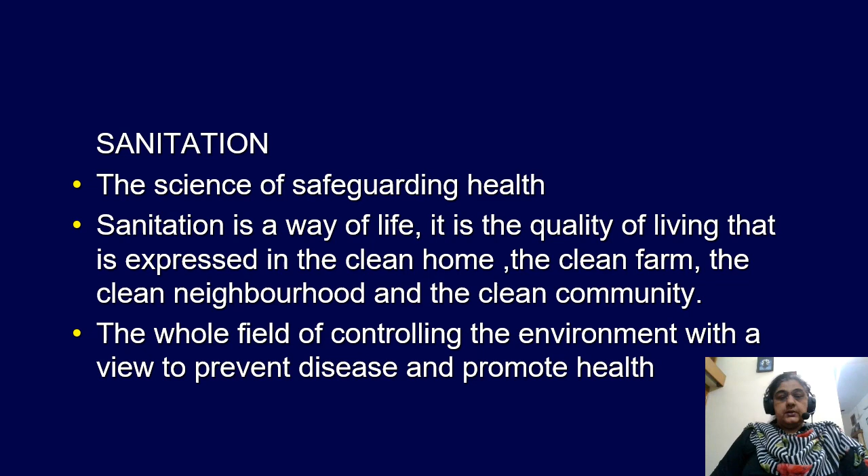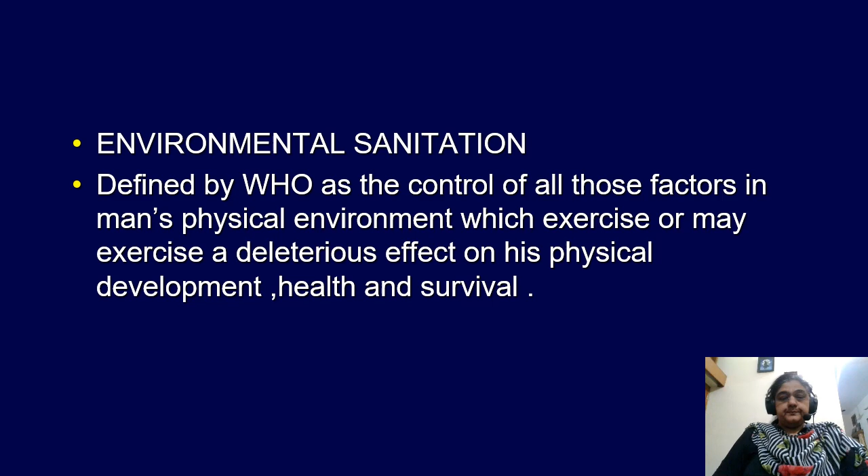Environmental sanitation is defined by WHO as the control of all those factors in man's physical environment which exercise or may exercise a deleterious effect on his physical development, health and survival. Water forms a very important part of environment. Adequate supply of safe water and basic sanitation is one of the essential components of primary health care.

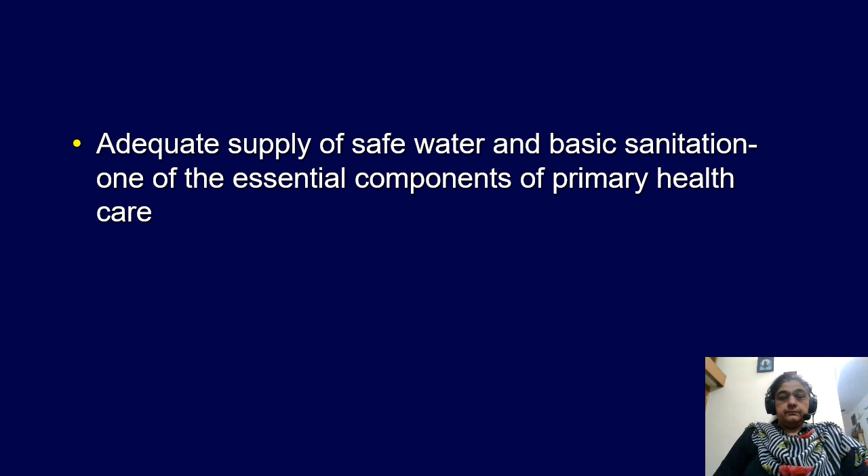So what is safe water? Water that is free from pathogenic agents, water that is free from harmful chemical substances, water which is pleasant to taste, that is, it is free from odor and color, water which is usable for domestic purposes, and the appearance, taste, and odor of the drinking water is acceptable to the consumer.

Then potable water or wholesome water. This is safe water, which is pleasant to taste, it is odorless, it is cool and it is colorless, and it does not stain the clothes or the utensils.

Now, water has various uses. It can have domestic uses, then uses for public purposes, it can have industrial uses, uses for agriculture purposes, uses for power production and other uses.

Then we have certain norms to calculate the water requirement, which are calculated per capita per day. In our country, it has been estimated that in rural areas, the minimum requirement of water per capita, meaning per person per day, is 40 liters and it can vary up to 55 liters. Whereas for every head of cattle, the water requirement is calculated at 30 liters per head of cattle per day.

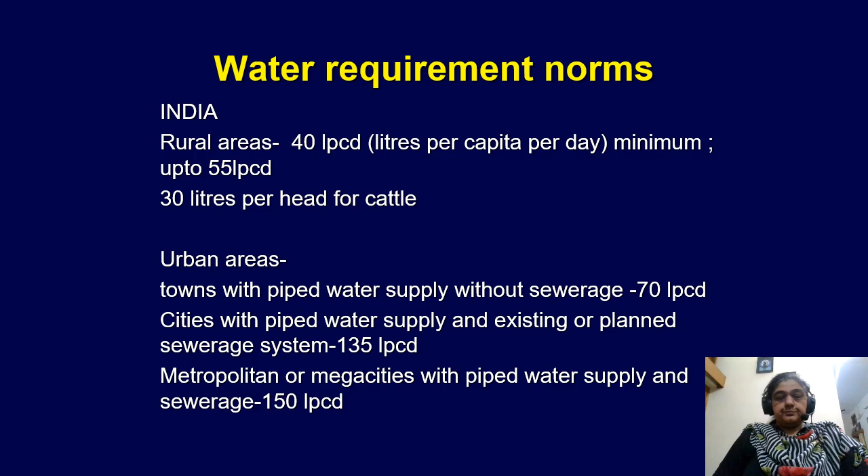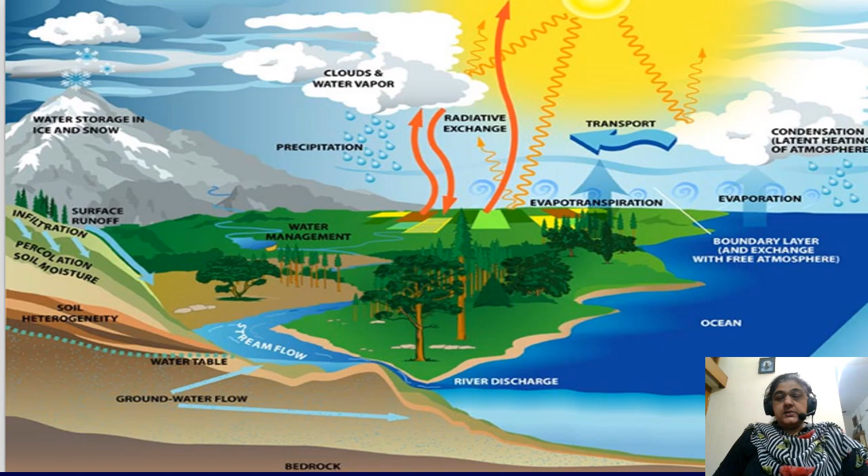So you see, water exists in various forms as ice and snow. Then there is surface runoff. It infiltrates and percolates into the soil. And then there is a water table below the soil in the subsoil. Then there is flow of groundwater into streams and rivers and ultimately into oceans. Water evaporates from there, then clouds are formed and again rainfall occurs, and the cycle continues.

The water resources or reservoirs are distributed such that the ice caps and glaciers have 1.7 to 2.02% of the water on earth. Soil moisture is 0.005 to 0.012%. Rivers, lakes and inland seas are 0.14%. Groundwater is 0.4 to 1.7%, whereas oceans make up 97 to 97.5% of the water on the Earth's surface, and 0.001 to 0.01% is in the atmosphere.

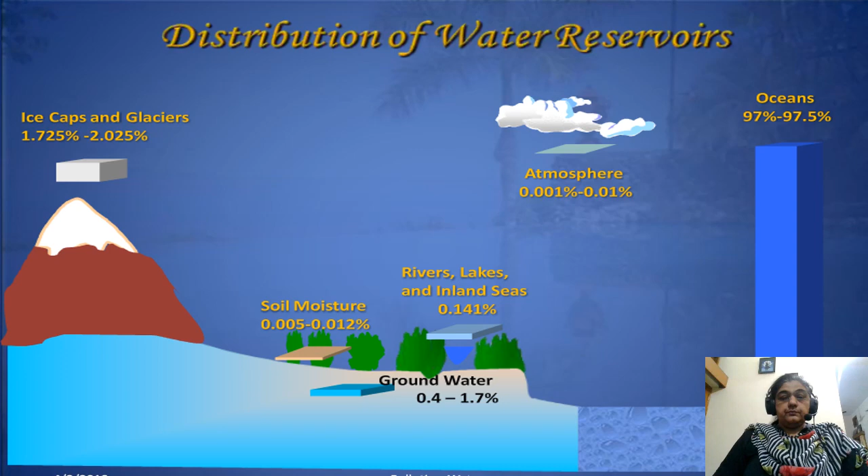The main sources of water supply are rain. Then we have surface water. We can have impounding reservoirs. We can have rivers and streams. We can have tanks, ponds, and lakes. And in groundwater sources, we have shallow wells, deep wells, and springs.

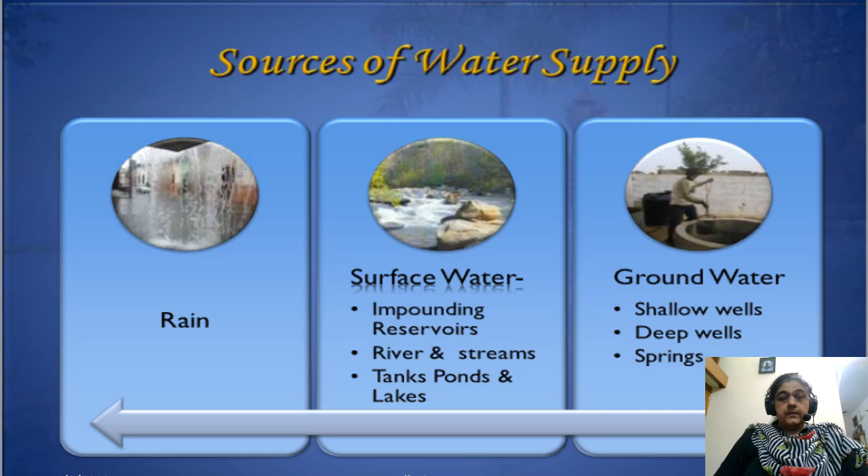Now, what is a shallow well and what is a deep well? A shallow well is that which draws the water from the first level, that is above the first impervious layer. And a deep well is that which draws the second level of water or deeper water, meaning water which is below the first impervious layer.

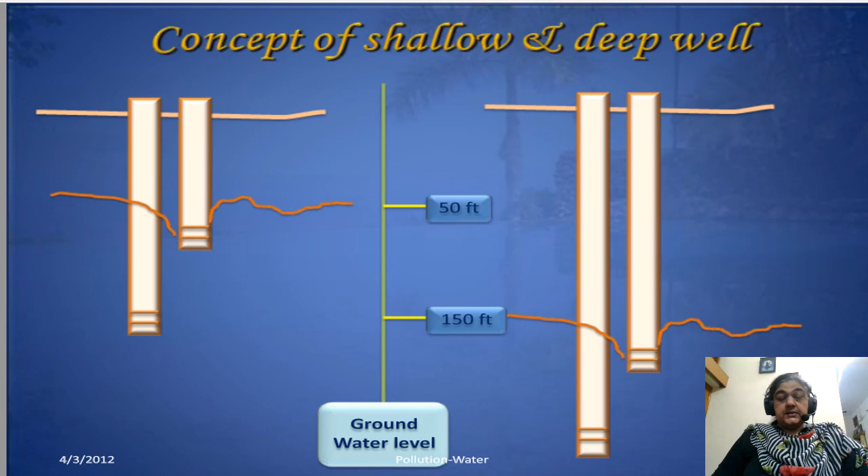So the water from the deep wells is considered safer than the water from the shallow wells. Why? Because water from the shallow wells is the first level of water. It can get contaminated by the water discharged from various sources like the septic system, the animal houses and barns, then the fertilized fields, etc., from the grasslands and woodlands and all. So deep water, below the first impervious layer, is safe compared to the shallow water. However, water can get contaminated even during storage. So even safe water has to be stored correctly for it to remain safe.

Then this is the supply of the water resources. So 97% of the ocean water or sea water is saline water, and 3% of water on the earth's surface is fresh water. This fresh water is divided into ice caps and glaciers, which have 68.7% of this fresh water.

Then 30% of the fresh water is groundwater, 0.3% is surface water, and other sources constitute 0.9%. Now, out of this 0.3% surface water, 87% is present in lakes, 11% in swamps, and 2% in the rivers.

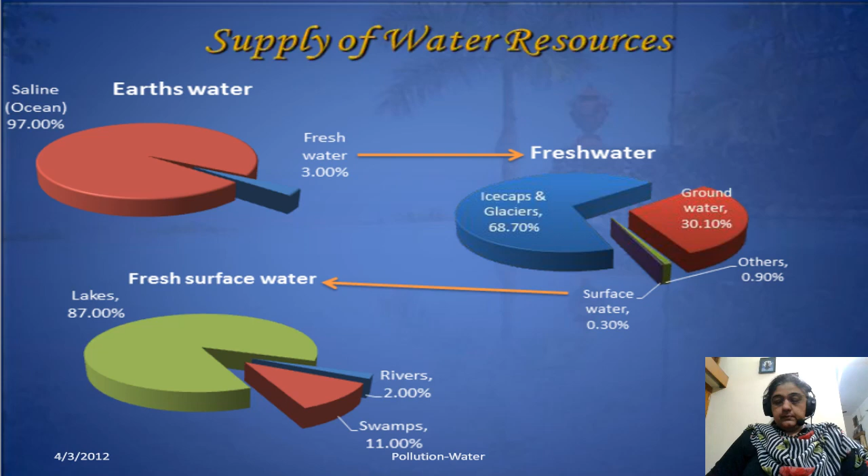So, if you see the utilization of ground and surface water, 89% of surface water is used for agricultural purposes, 9% for domestic, and 2% for industrial uses. And groundwater withdrawals are 92% for agricultural purposes, 5% industrial, and 3% for domestic purposes.

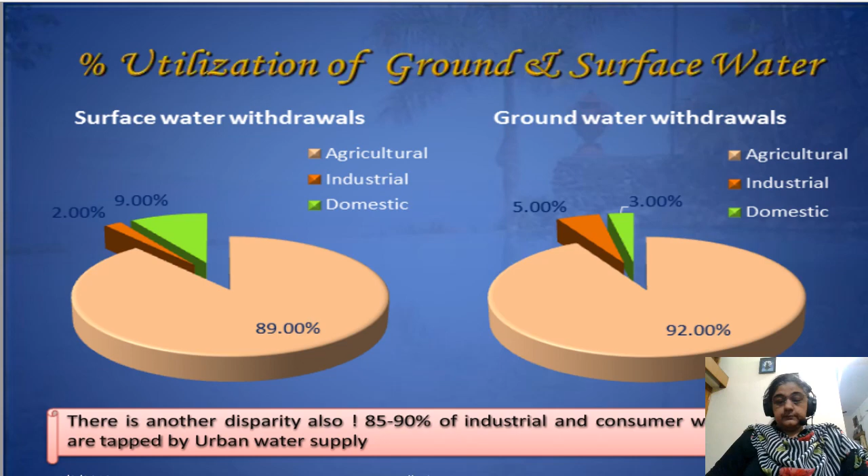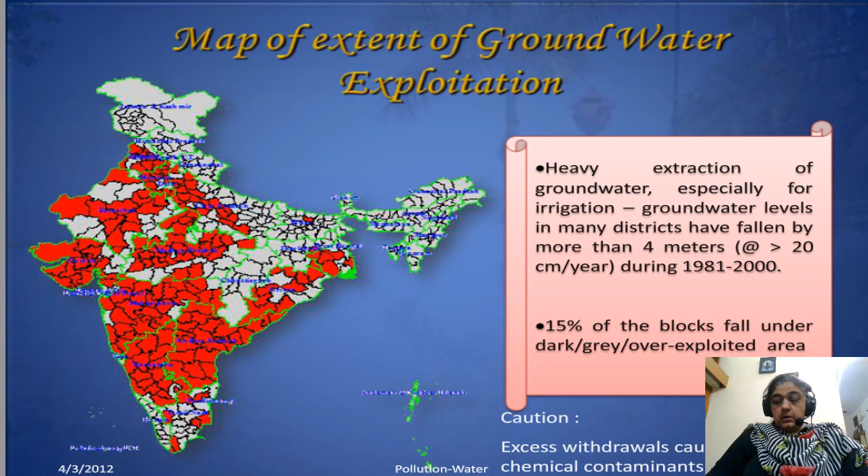Now see, this is the map which shows us the extent of exploitation of the groundwater in the country. So heavy extraction of groundwater, especially for irrigation, has led to a fall in the water table. And this is becoming a very serious problem.

So we are heading towards water scarcity, zero water cities. 21 cities have been predicted that they will be running out of water by 2030. Chennai, it seems, is already out of water. Then we have Bengaluru, we have Coimbatore, and a host of other cities which are likely to run out of water by 2030.

So what needs to be done? We have to catch every drop of water that is falling on the earth.

And most of the rural water supply systems are based on groundwater sources. 85% of groundwater sources are drawn for irrigation, and rural drinking water draws hardly 3%.

So groundwater development in Delhi, Haryana, Punjab and Rajasthan is more than 100%, and in Gujarat, Karnataka, Tamil Nadu and Uttar Pradesh it is more than 70%. So an imbalance is existing between over withdrawal of groundwater and the recharge of the deficit of groundwater.

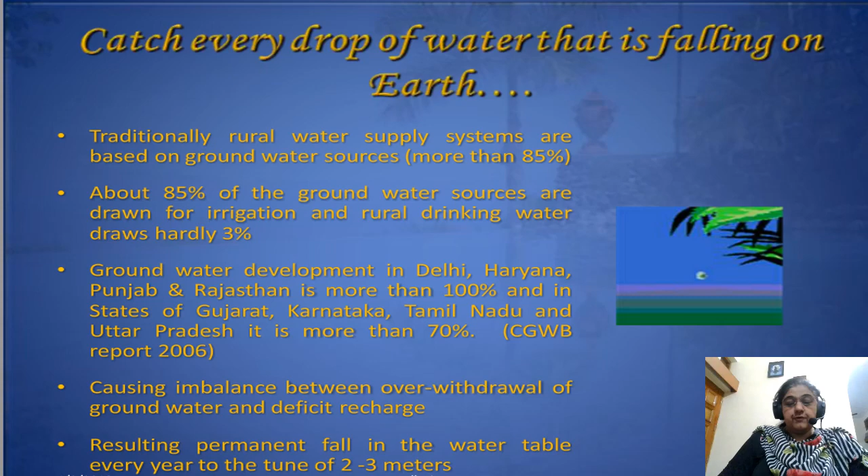So this is resulting in a permanent fall in the water table every year to the tune of 2 to 3 meters.

And there are three major and widely prevalent problems in the sustainable supply of drinking water. These are scarcity of drinking water, then brackishness, then excess fluoride and arsenic content in drinking water. These are manifested primarily in areas with low rainfall and those which have high potential evaporation.

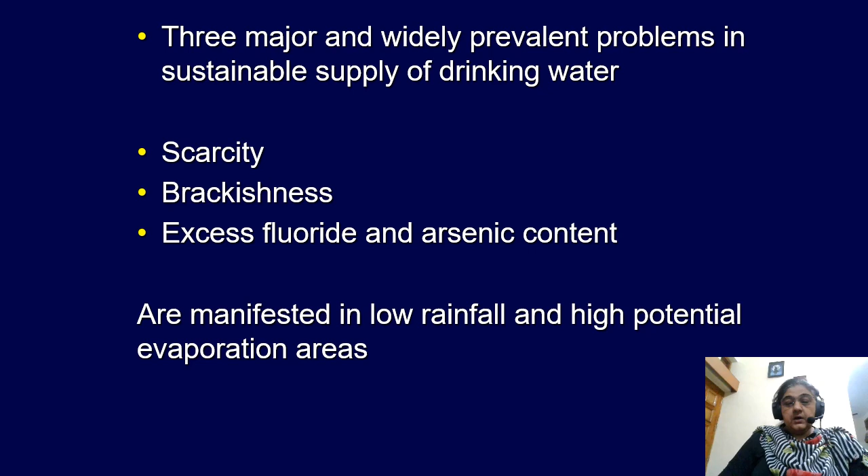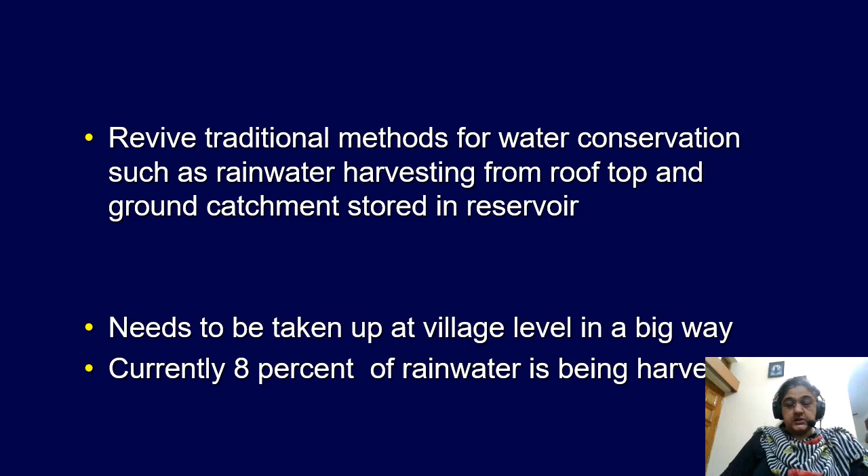So we have to revive the traditional methods for water conservation, such as rainwater harvesting from the rooftop and ground catchment, which is stored in reservoirs. This needs to be taken up at village level in a big way. Currently only 8% of rainwater is being harvested, so this needs to be increased tremendously.

Then there's a term known as water pollution. So water pollution means that something is polluting the water, making it unfit for consumption. These sources can be point source or non-point source.

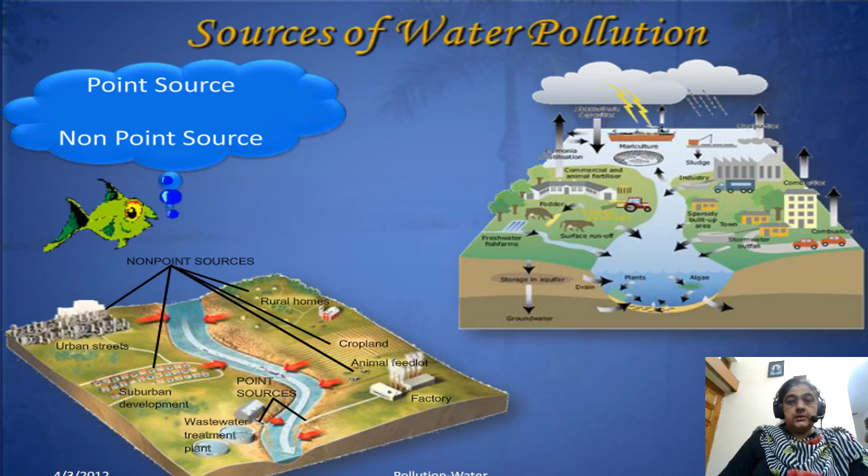And point source may be a single large source which can be localized to one spot, like sewage pipes, leaky gas tanks, industrial sites, and injection wells.

Then we have non-point sources, diffuse sources or many smaller point sources, such as agriculture runoff, urban runoff, construction sites, and air pollution.

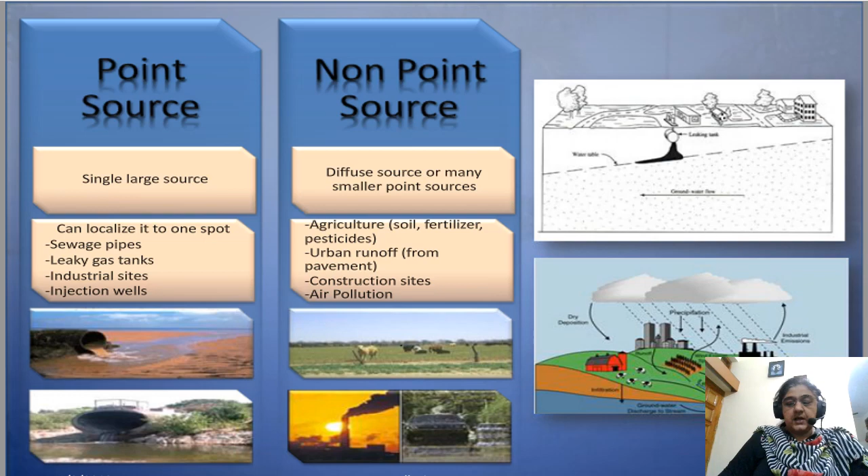So we also have the flow of underground contaminations which contaminate the water table, like runoff from industries, leakage of an underground storage tank, then wastewater from households which can contaminate the wells or even the rivers and ponds.

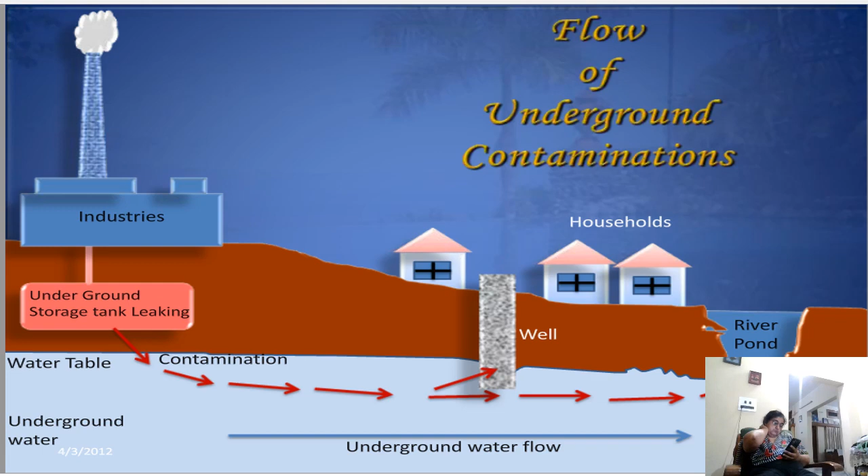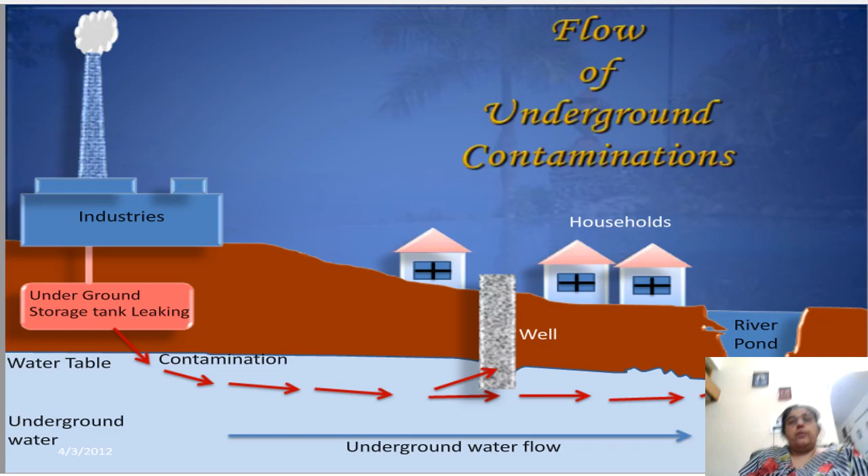Then the classification of various sources of pollution can be agricultural, transport, mining, industry and trade, public supply, and other sources of pollution. So these can be biological pollutants, chemical pollutants, or physical pollutants.

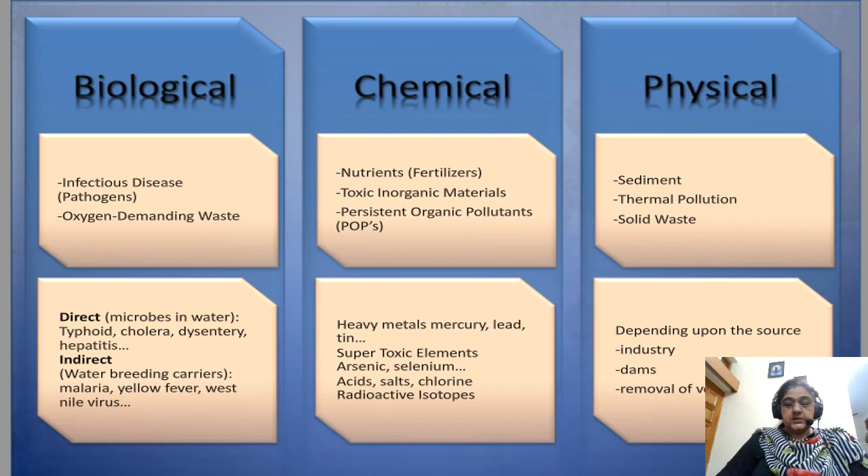So the health dimensions of water pollution are tremendous. We have various types of diseases like waterborne diseases, water-based diseases, water-related vector-borne disease, and water scarce or water-washed diseases due to lack of adequate water.

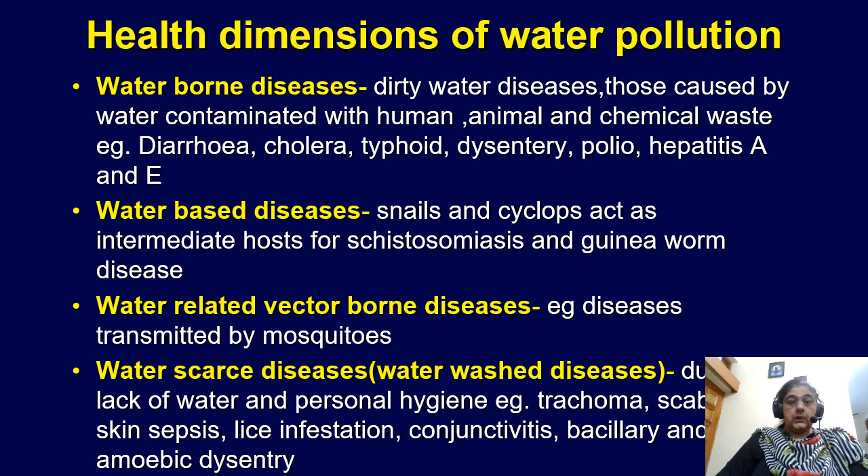So now there is a question: how does water clean itself? Whenever a pollutant is added to a water body, oxygen present in the atmosphere and in the water, in the presence of sunlight, converts some of the organic matter to harmless things in the water body itself, by dilution, by sedimentation, by small fish or animals, bacteria or molds. These digest the organic materials. But there is a certain limit to this self-cleansing by the water body.

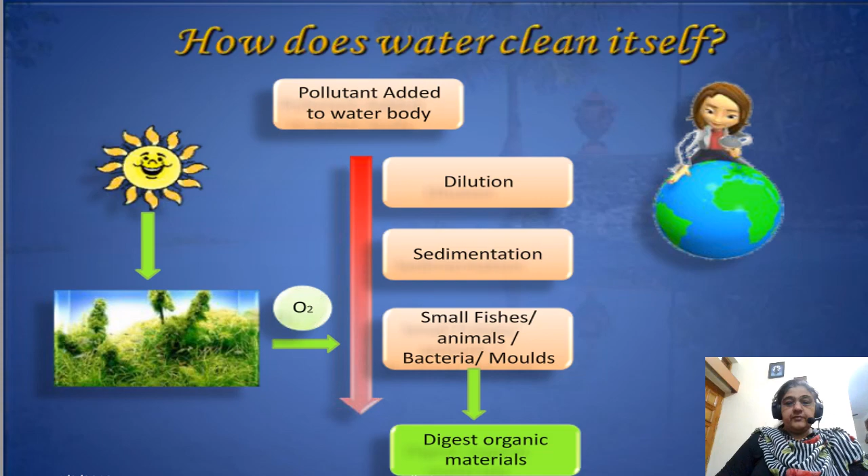So what happens when excess pollutants are there? Then these methods are not sufficient to clean the water body.

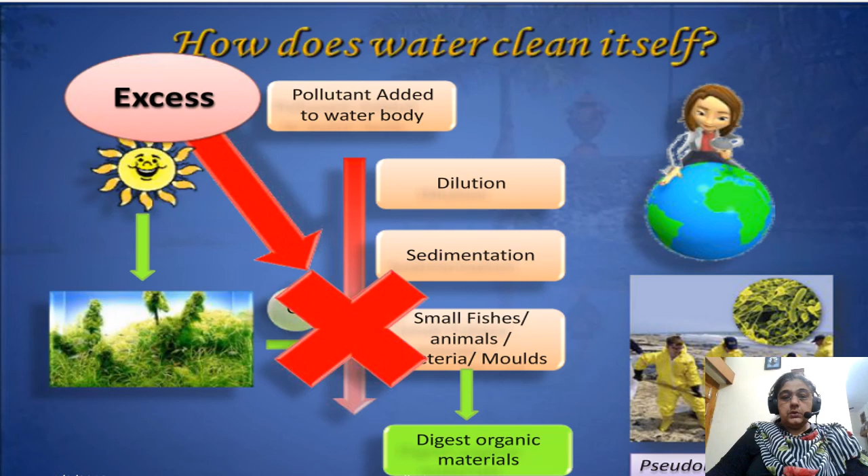The dissolved oxygen in water is a measure of water quality. If the water is gravely polluted, the parts per million of dissolved oxygen at 20 degrees centigrade will be less than 4. In heavily polluted water it is between 4 to 4.5. Between 4.5 to 6.7 is moderately polluted, and 6.7 to 8 is slightly polluted. Good quality water has 8 to 9 parts per million of dissolved oxygen at 20 degrees centigrade.

So why do we need to treat wastewater? Because it causes a demand for dissolved oxygen and lowers dissolved oxygen levels in streams if dirty water is being added to them. Certain nutrients like nitrate and phosphate present in wastewater cause excessive growth of microorganisms, and increase the suspended solids or sediments in the stream, so the turbidity increases.

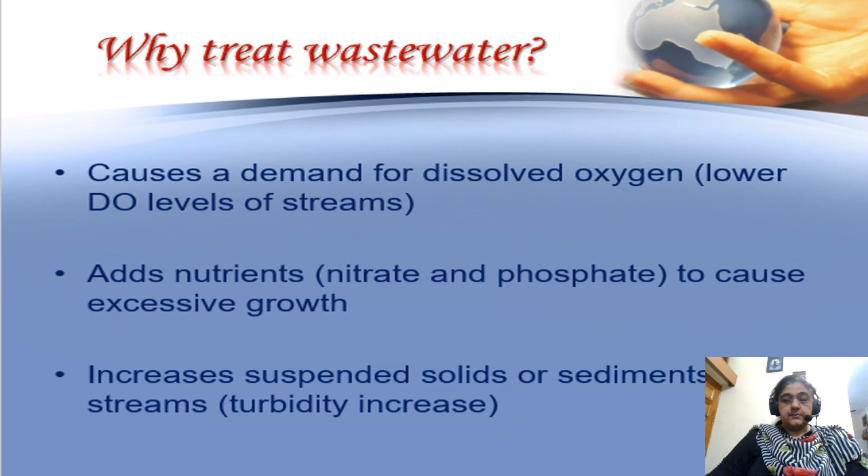For purifying water, on a large scale we have methods such as storage, filtration and disinfection. On a small scale, for household practices, we have boiling, chemical disinfection and filtration.

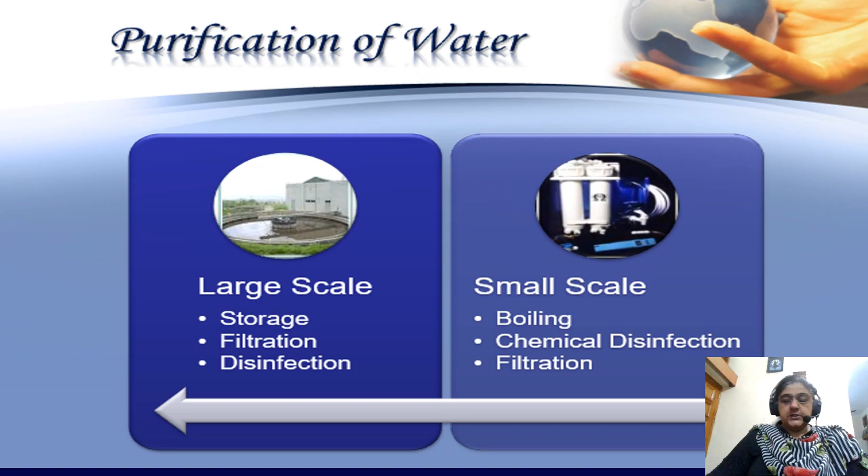In large scale purification, the first step is storage. What happens during storage? Biological changes occur and the bacterial count decreases. The aerobic bacteria bring certain changes in the chemical quality of water, and the physical impurities settle down. There is a drop in the bacterial count of 90% in 5 to 7 days. The optimum period of storage is 10 to 14 days, beyond which the growth of organisms occurs.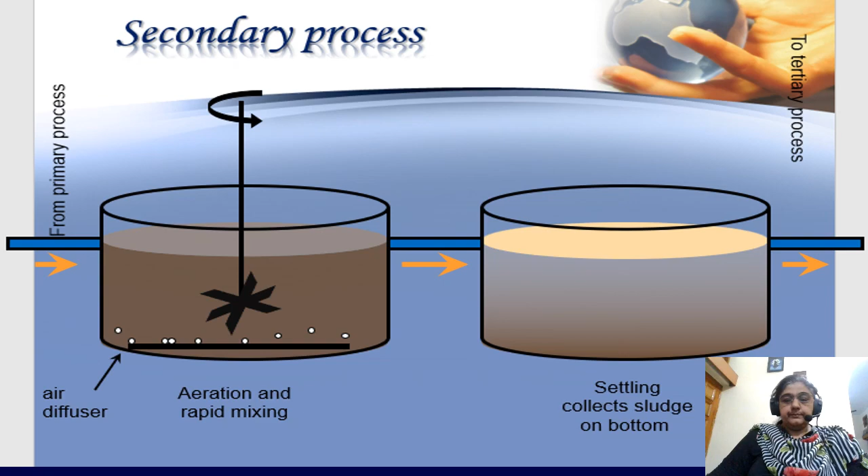Then anaerobic microbiological processes take place, and the nitrates are converted to nitrogen which escapes into the atmosphere. The phosphates, if not removed in the sludge, react with aluminium, and aluminium phosphate is deposited into the sludge. Aeration is done to strip the nitrogen gas and to reoxygenate the water, meaning we want to increase the dissolved oxygen. So the quality of water improves as the dissolved oxygen levels go up.

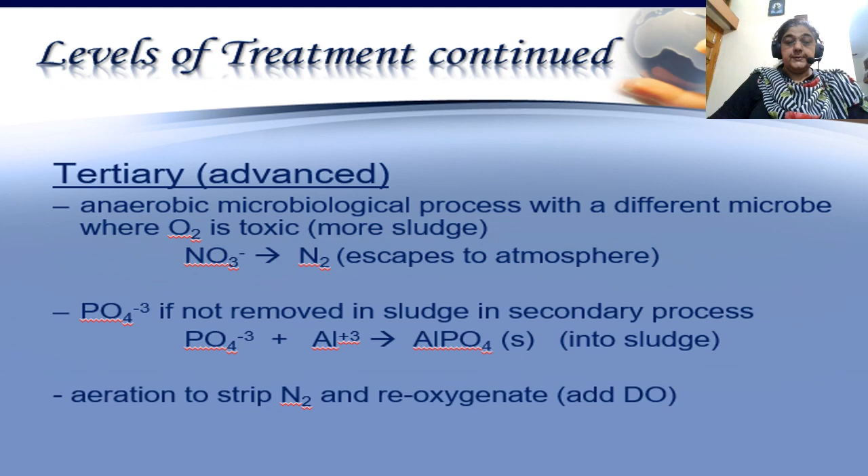In tertiary processes, there is slow mixing to keep the suspended particles and oxygen out, and then we lead the effluent to a settling tank where the sludge settles on the bottom and the supernatant is drained off.

Then we have various kinds of filters: slow sand filters, rapid sand filters, pressure filters and diatomite filters. A slow sand filter has a layer of slimy growth consisting of algae, diatoms and bacteria over the filter bed. It takes some time for this layer to appear, known as ripening of the filter bed. Below it is the filter bed made of sand, and an under-drainage system running between the various chambers of the filter.

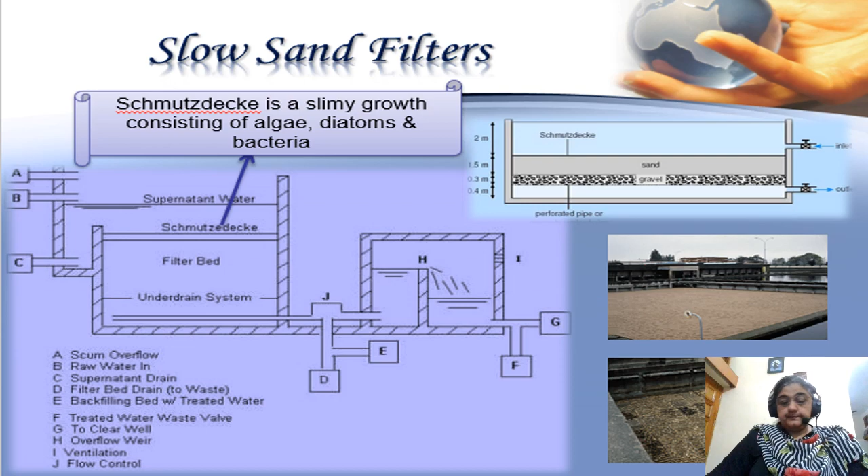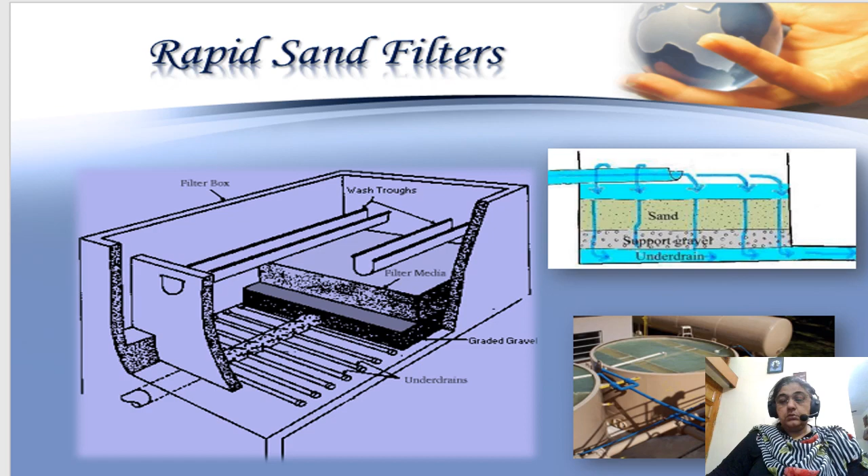Rapid sand filters are different from slow sand filters; they don't have the organic layer. In this method, chemicals are added, and by flocculation the impurities are made to settle down, followed by further purification of the water.

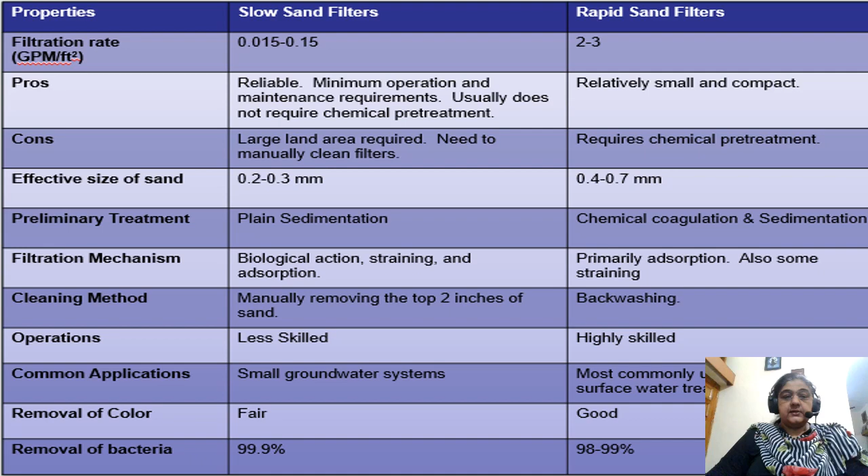Then the next step is disinfection, meaning we add a disinfectant. What is a disinfectant? Any substance capable of destroying pathogenic organisms and which is less influenced by physical and chemical surroundings. It should not leave products which render the water toxic, impart color to the water, or otherwise make it unpotable. The disinfectant should be readily available at a reasonable cost with dependable availability. It should have residual properties to prevent recontamination of water, and it should be amenable to detection in small concentrations.

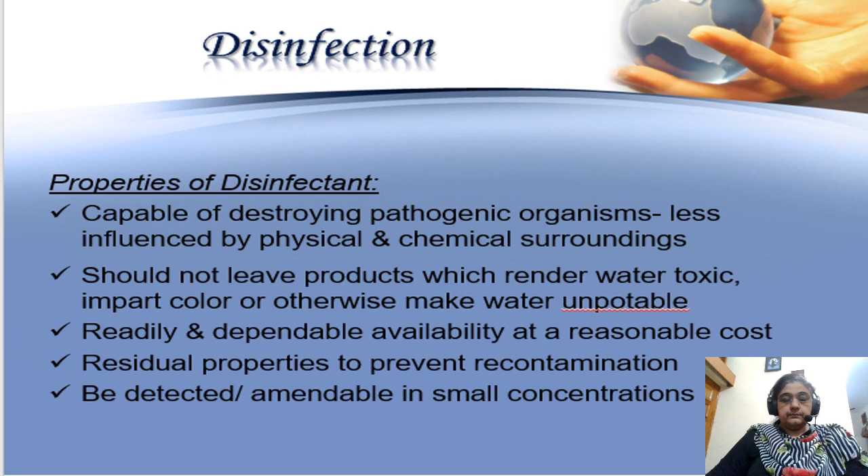Then chlorination of water. Chlorination is the process of adding the element chlorine to water as a method of purification to make it fit for human consumption as drinking water. It is a supplement but not a substitute for filtration. Water treated with chlorine is effective in preventing the spread of disease. The disinfecting action of chlorine is due to hypochlorous acid, and it is effective when the pH of the water is around 7.

Now the chemical reactions in water: when chlorine is added to water, it reacts to form a pH-dependent equilibrium mixture of chlorine, hypochlorous acid and hydrochloric acid. Depending on the pH, hypochlorous acid partially dissociates into hydrogen and hypochlorite ions. In acidic solution, the major species are chlorine and hypochlorous acid, while in alkaline solution effectively only hypochlorite ion is present, with very small concentrations of other chlorine ions found.

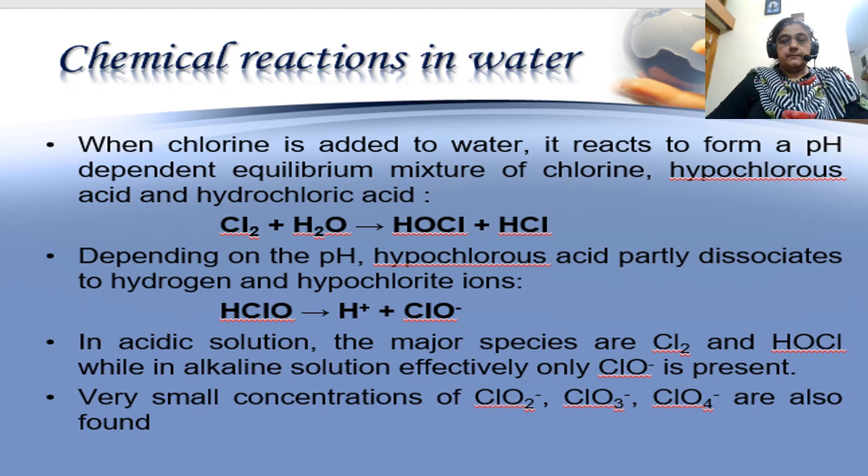The basic principles of chlorination are that the water should be free from turbidity, because turbidity impedes the process of chlorination. Then we have to calculate the chlorine demand of the water. We have to have a minimum contact period, which should be at least 1 hour, for the chlorine to be in contact with the water so that all the bacteria and viruses are killed. Chlorine has no effect on the spores and on some viruses.

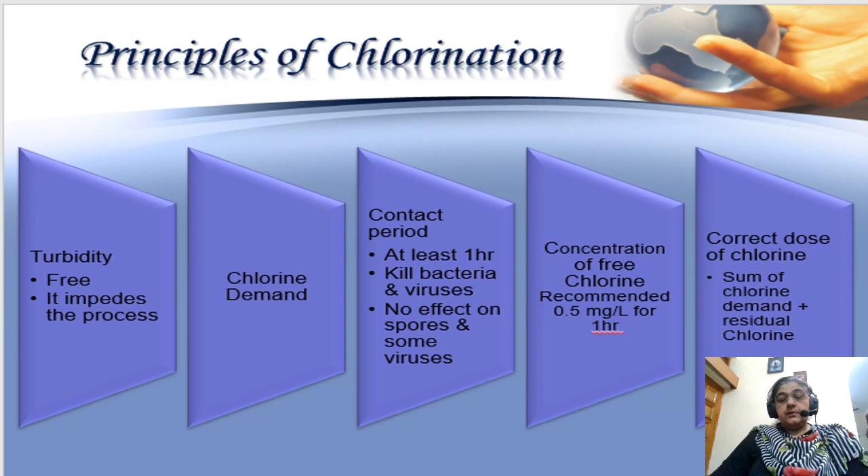Then we need a concentration of free chlorine. The recommendation is 0.5 milligram per liter. Why? Because for any contamination which occurs afterwards, we need to add a bit of extra chlorine. Then we have to calculate the correct dose of the chlorine. This will be the sum of the chlorine demand of the water plus the residual chlorine which we want to be there at the end of the process of chlorination.

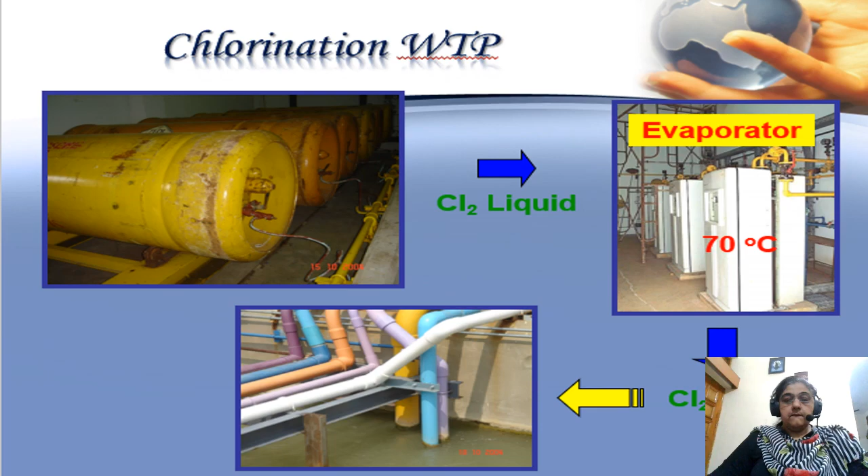We have a term, breakpoint chlorination. It means that no ammonia or free monochloramine radicals are there in the water, because ammonia is a marker of organic matter, and no free available chlorine will be present in the water. That will be the breakpoint. Further addition of chlorine will produce free available chlorine in the water. So when we add chlorine to exceed the breakpoint, it is called breakpoint chlorination.

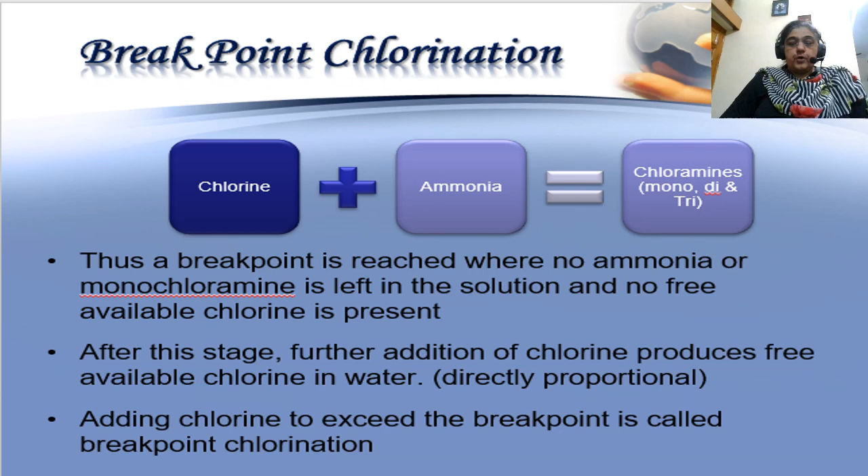Then we have superchlorination, or shocking the system. Under certain circumstances, it will be necessary to subject the water system to an extremely high chlorine dosage. This process ensures that free chlorine residual is high enough to inactivate or destroy harmful organisms. It's usually done at the beginning of an operational season if the system operates seasonally, after installing or repairing the system, when lab results indicate the presence of bacteria, following contamination by flood water, and to control iron and sulfur bacteria.

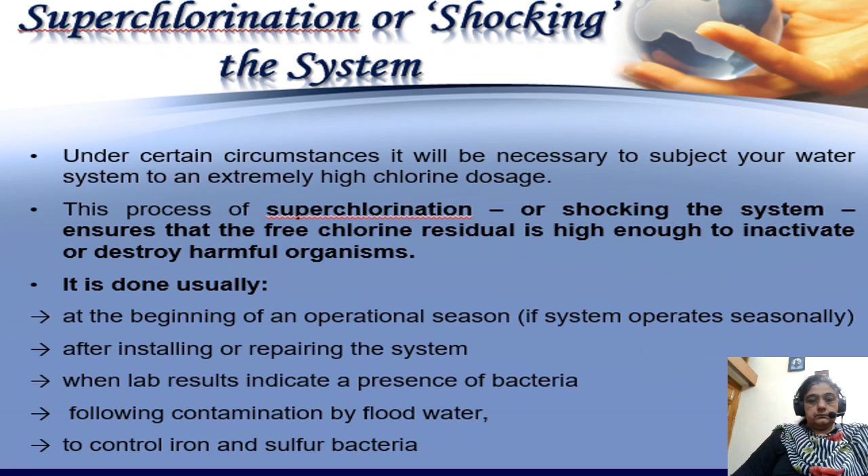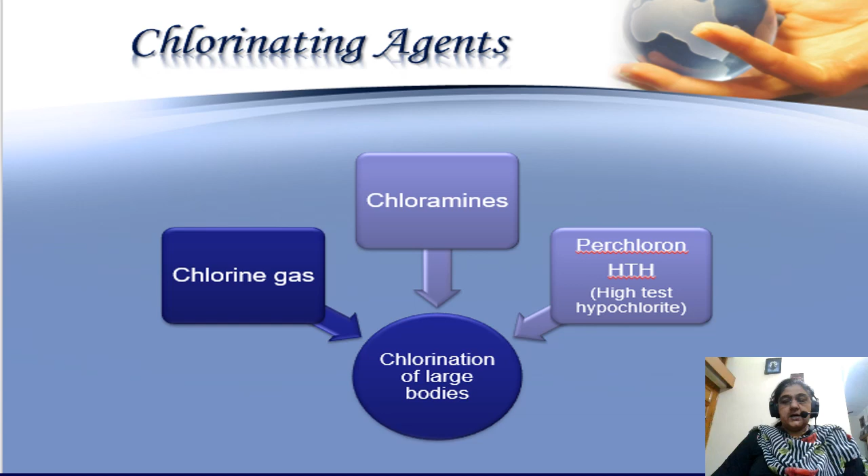The various chlorinating agents are chlorine gas, chloramines and perchloron or high test hypochlorite. Other disinfectants for water are ozone, ultraviolet rays and anolytes. There is a test known as the orthotoluidine arsenite test, or OTA test. This is used for measuring the relative amounts of total residual chlorine, free available chlorine and combined available chlorine in the water.

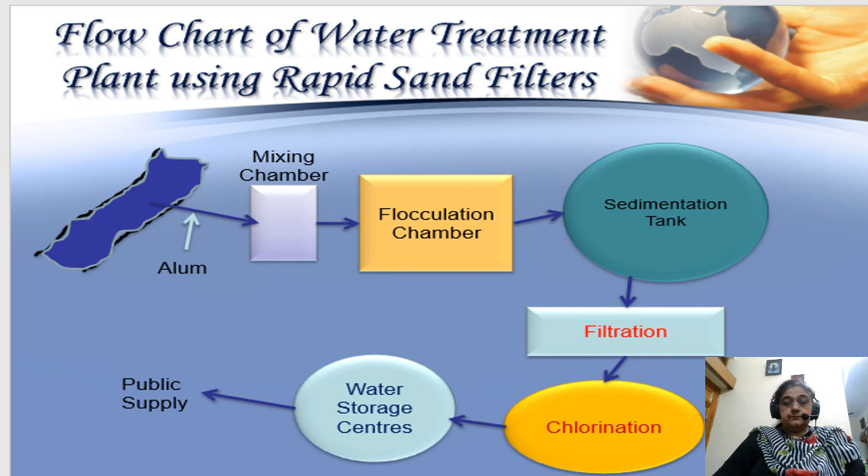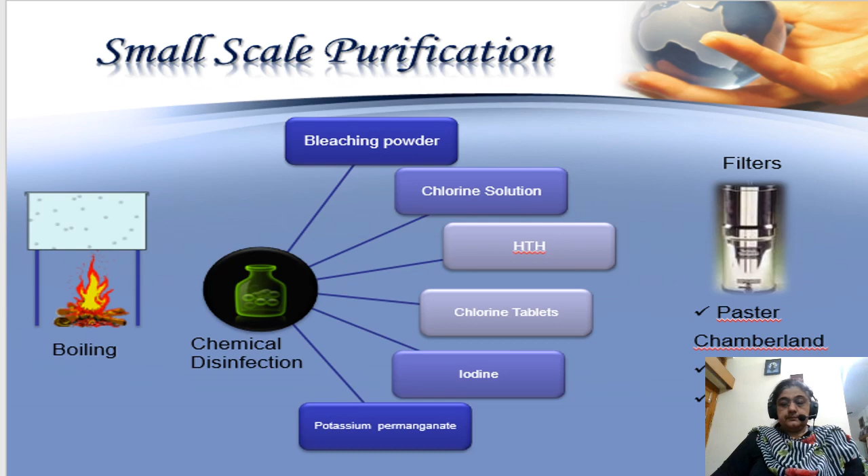So what happens in filters? Different types of candles are used. The Pasteur Chamberland uses a porcelain candle. The Berkefeld filter uses a candle of Kieselguhr or infusorial earth. The Katadyn filter has the candle surface coated with a silver catalyst which kills the bacteria by an oligodynamic action.

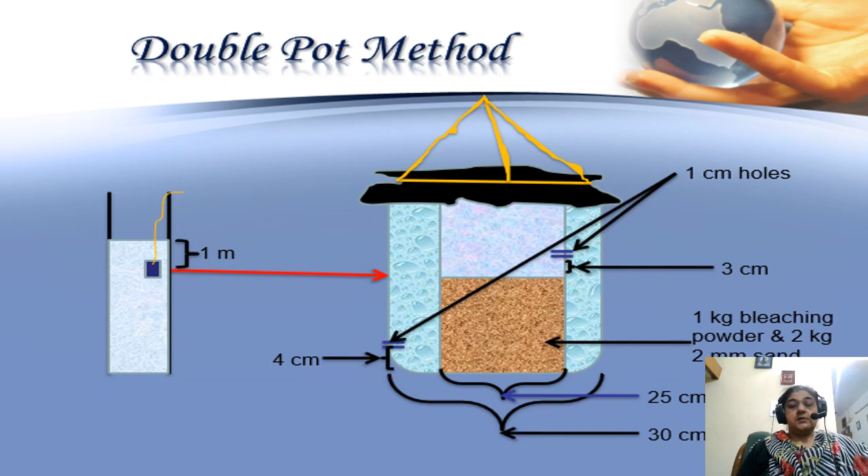In small scale purification, we also have well disinfection, because wells are a source of water for a large proportion of the population. So how to disinfect a well? First, we calculate the volume of water in the well in liters. If we know the diameter of the well, we can calculate the volume, and then we calculate the bleaching powder amount required using the Horrocks apparatus. A double pot method is used to add the bleaching powder to the well. The construction of the pot ensures proper mixing of the well water with the bleaching powder.

So we have a 20-liter bucket of water and we have high test hypochlorite, chlorine granules or powder. We calculate the volume of water in the well. We fill the bucket with clear water from the well. We add 50 grams of high test hypochlorite and we stir it until it is dissolved. And for every cubic meter of water in the well, we add 10 liters of the chlorine solution.

So the importance of purification of water cannot be undermined because all types of impurities must be removed from the potable water. So safe drinking water and wholesome water must meet certain physical, chemical, and biological standards, and purified water can significantly reduce the morbidity and the mortality from waterborne diseases.

So WHO has laid down certain criteria which are known as water standards. Now there are certain aspects of this which are acceptability aspects, which are physical and inorganic constituents. Then we have microbiological aspects, chemical aspects, and radiological aspects. So the water should be free from turbidity, it should be color free, less than 15 true color units, it should be free from taste and odor, and it should be cool.

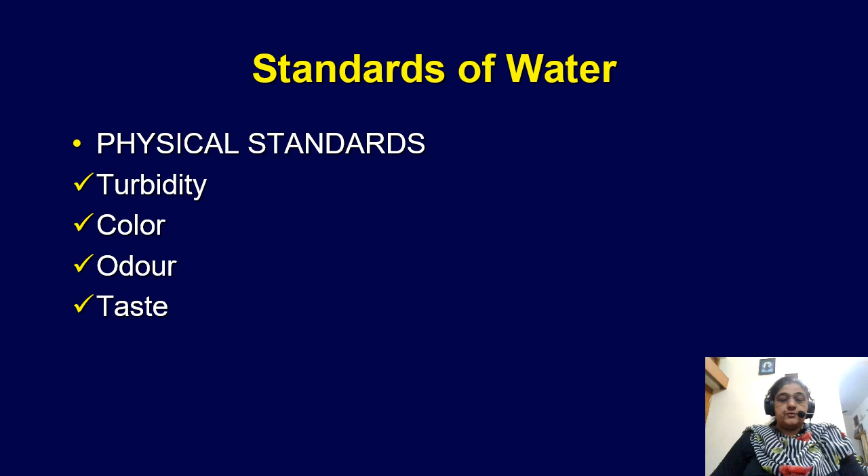So for sampling, we have to collect the water samples, store them and transport them for testing. We have to collect samples from taps, rivers, streams, tanks and wells, and subject them to physical and chemical examination and bacteriological examination. Then physical standards should be there, as I have told earlier. Standards for turbidity, color, odor and taste should be within limits.

Then chemical standards should be as per norms. Hardness, chlorides, ammonia, nitrites, nitrates, absorbed oxygen and dissolved oxygen should be within limits. Then toxic substances and a specific group of chemicals causing non-specific diseases of water should not be there. Polynuclear aromatic hydrocarbons and radioactive substances should be within limits.

WHO recommends that all samples from the distribution system should be free from coliform organisms. In practice, it's very difficult to attain this standard. So the recommended standards are that throughout any year, 95% of samples of 100 ml each should not contain any coliform organisms. No sample should contain E. coli. No sample should contain more than 3 coliforms, and any 2 consecutive samples should not contain coliform organisms.

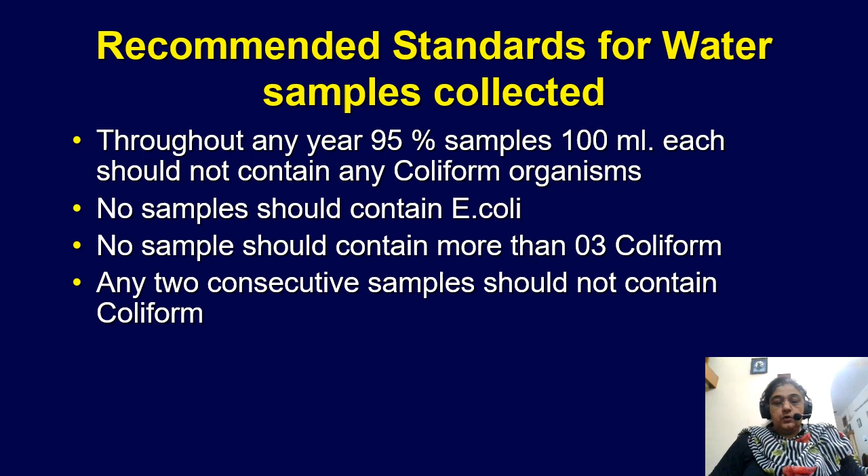In case of individual or small water supplies, such as from household tap, well, spring, etc., the coliform count should not exceed 10 per 100 ml and E. coli should be nil, because E. coli indicates fecal contamination. So E. coli should be nil.

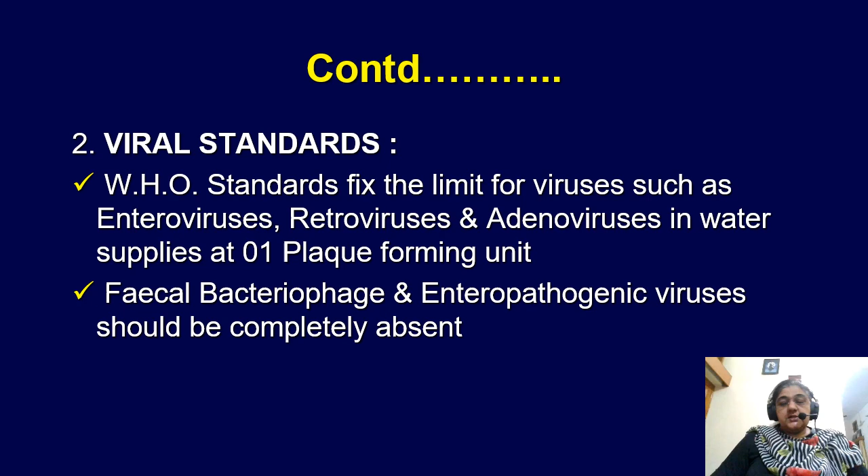Then we have viral standards. So the WHO has fixed the limits for viruses such as enteroviruses, retroviruses, and adenoviruses in the water supplies at 1 plaque forming unit. Then fecal bacteriophages and enteropathogenic viruses should be completely absent.

So the bacteriological indicators are based on organisms indicative of fecal pollution. These organisms are E. coli and the coliform group as a whole. We have fecal streptococci, we have Clostridium perfringens, then examination for protozoa and examination for parasitic worms and larvae is also recommended.

So why are coliform organisms chosen as indicators of fecal pollution? Because they are constantly present in the human intestine, in an average person who excretes 200 to 400 billion of these organisms per day in the feces. They are foreign to potable water supplies, easily detectable by ordinary culture methods. Their survival time is much better than other organisms, and they have greater resistance to natural forces of purification.

So fecal streptococci occur regularly in much smaller numbers than E. coli, and their presence is regarded as confirmatory evidence of recent fecal contamination of water in doubtful cases. Then Clostridium perfringens are spore-bearing organisms, and their presence along with coliforms indicates recent water contamination. The presence of spores but the absence of coliforms confirms remote contamination of water.